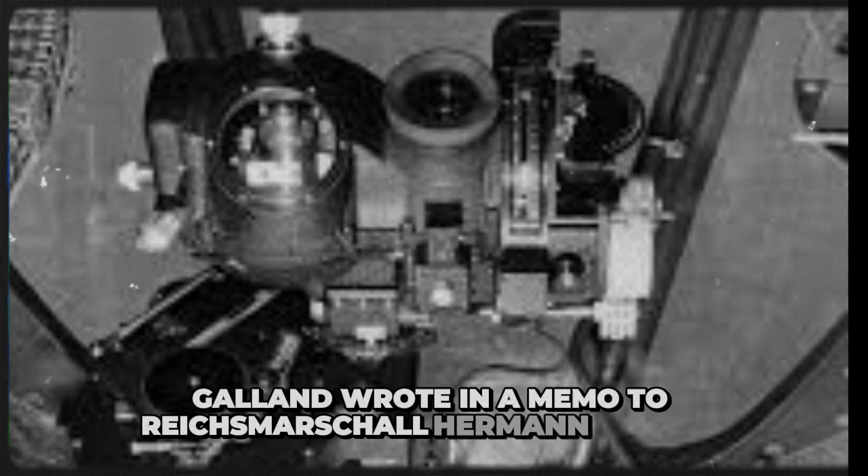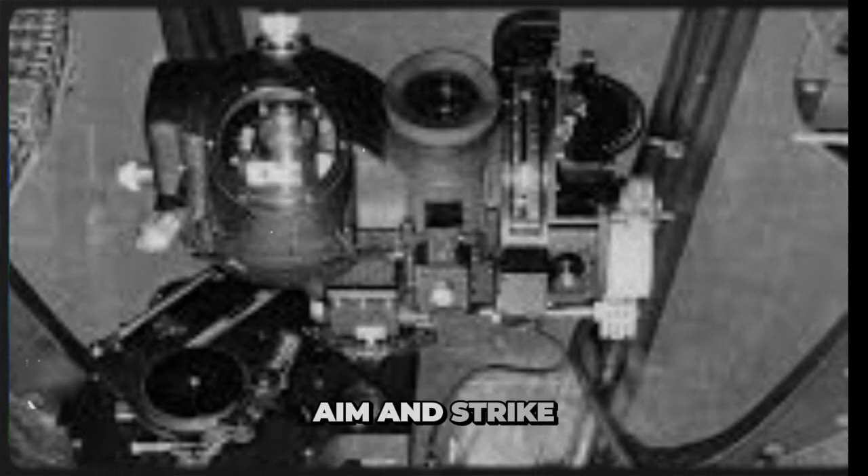'They can see what they're hitting,' Galland wrote in a memo to Reichsmarschall Hermann Göring in February 1943. 'Our bombers drop their loads in the general vicinity of targets and hope. The Americans select, aim, and strike, with a precision that suggests they possess technology we cannot match with our current methods.'

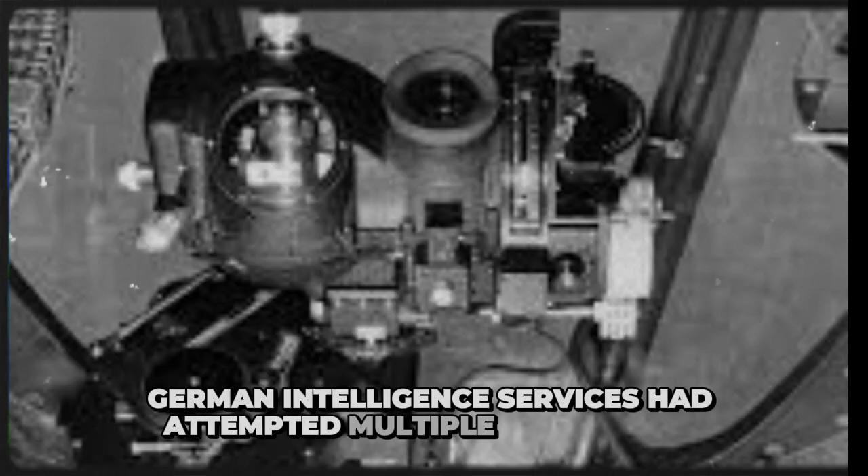The race to acquire a Norden bombsight had been ongoing since 1941. German intelligence services had attempted multiple approaches, recruiting American factory workers, bribing Air Corps personnel, even planning commando raids on American bases in England. All had failed.

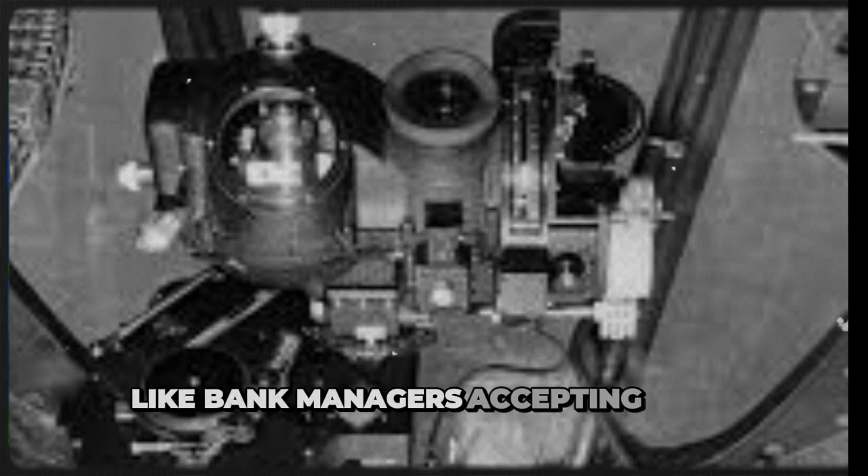The Americans had implemented security measures that seemed paranoid even by German standards. Each Norden bombsight had a serial number tracked from manufacture to deployment. Bombardiers signed for their devices like bank managers accepting gold reserves. Before every mission, the sight was carried to the aircraft in a locked case. After landing, it was removed immediately and returned to a secure facility.

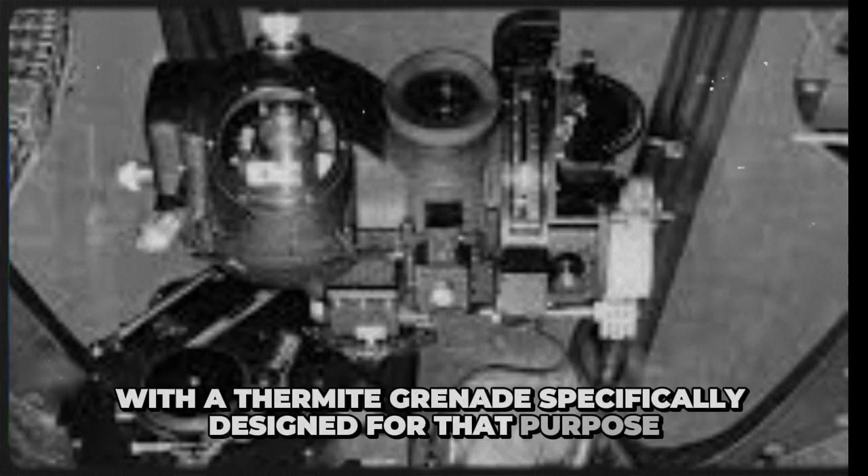If a bomber was badly damaged and forced to ditch over the ocean or crash land in enemy territory, standing orders required the bombardier to destroy the sight with a thermite grenade specifically designed for that purpose. The Germans had recovered dozens of crashed B-17s, but every bombsight had been destroyed, melted into slag, shattered by explosions, or smashed by desperate crew members before capture, until June 27, 1943.

The bomber that crashed in Wilhelmshaven had been hit by flak during its bombing run. The explosion had killed the bombardier instantly and started fires throughout the aircraft. The pilot had managed to maintain control long enough to clear the city before the plane came apart in mid-air. The bombardier's compartment, including the Norden sight, had separated from the fuselage and crashed into a muddy field outside the city. The soft earth had cushioned the impact.

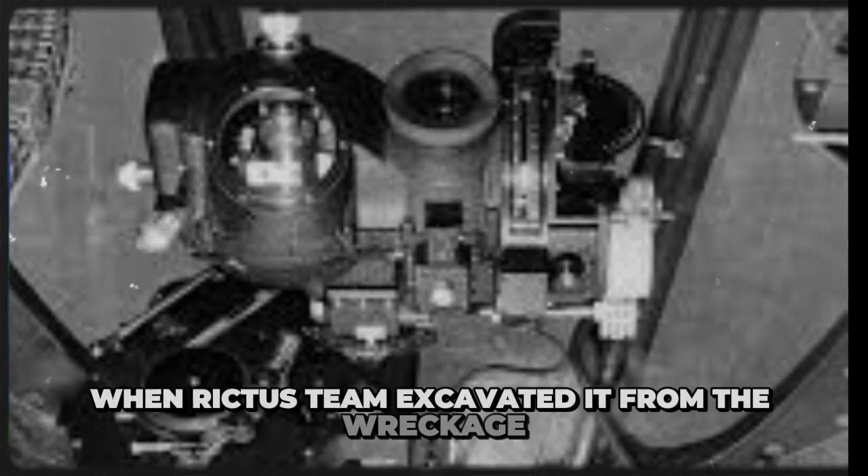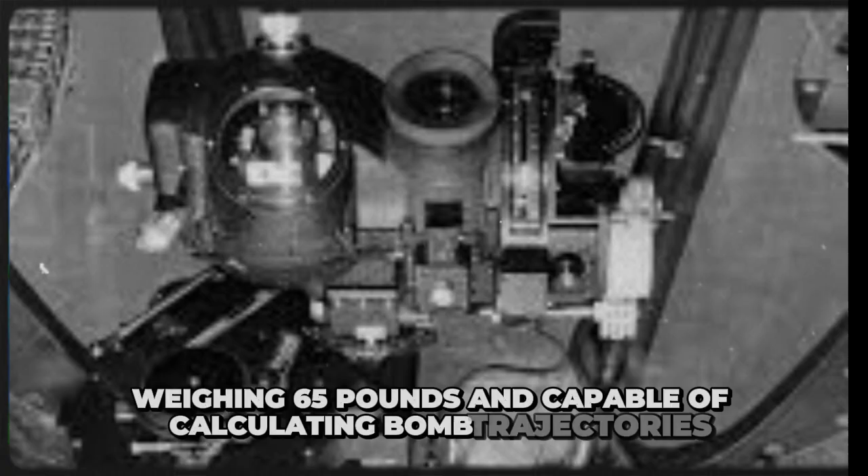The bombsight, designed to survive the vibrations and stresses of high-altitude flight, had remained largely intact. When Richter's team excavated it from the wreckage, they found themselves looking at a device that seemed almost alien in its complexity. The Norden Mark XV was a masterpiece of American precision engineering, a gyroscope-stabilized analog computer containing over 2,000 individual parts, weighing 65 pounds, and capable of calculating bomb trajectories while compensating for altitude, airspeed, wind drift, and the Earth's rotation.

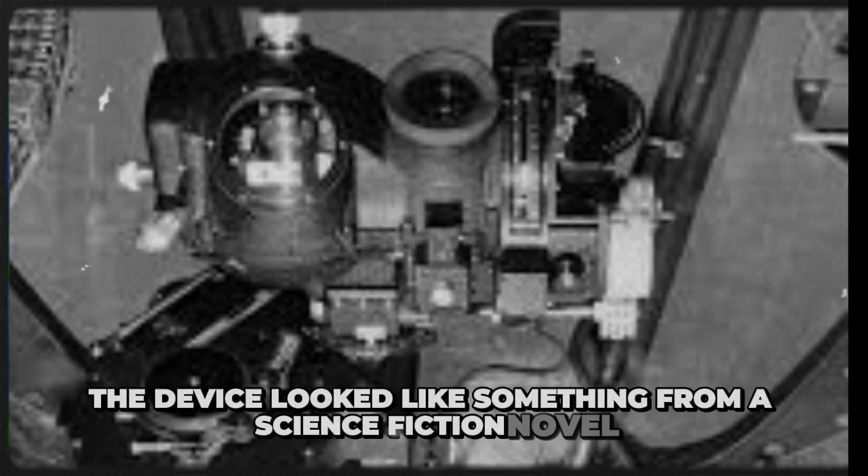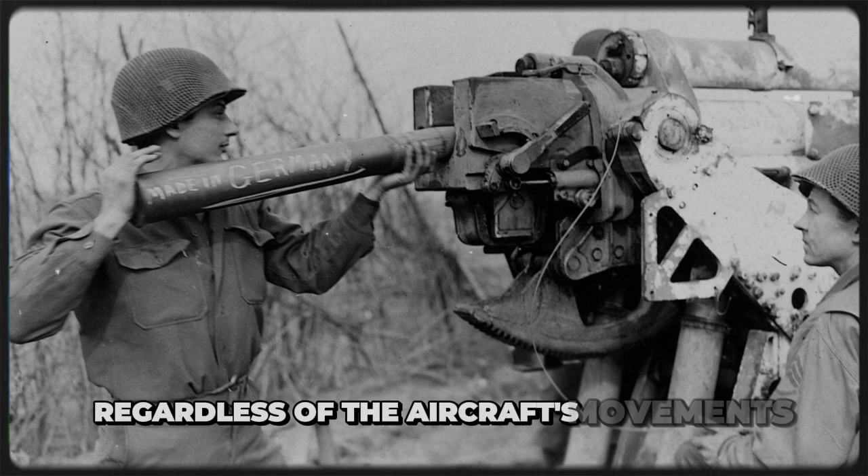The device looked like something from a science fiction novel. Two main components dominated the assembly: the stabilizer, which used gyroscopes to maintain a stable platform regardless of the aircraft's movements, and the sight head, which allowed the bombardier to track the target and feed corrections into the computer. Between these components ran a maze of gears, cams, bearings, and mechanical linkages of breathtaking precision.

"Photograph everything before we move it," Richter ordered. "Document the position of every component. We may never get another chance like this."

The team worked through the night, taking hundreds of photographs from every angle. They sketched diagrams, measured dimensions, and carefully noted how components connected to each other. By dawn, they had created a preliminary technical file that filled 2 briefcases. The bombsight itself was packed in foam rubber, placed in a wooden crate, and loaded onto a truck for the journey to Rechlin. At Rechlin, the Luftwaffe's most experienced engineers gathered to examine the prize.

Dr. Hermann Föttinger, who had designed bombsights for the Luftwaffe since 1935, was given the honor of the first detailed examination. He spent 6 hours studying the device with magnifying glasses, micrometers, and calipers, taking measurements and making notes. His preliminary report, submitted that evening to Luftwaffe Command, was both awed and troubled.

"This device represents the highest achievement in mechanical analog computing I have ever witnessed," Föttinger wrote. "The precision of its components exceeds anything we currently manufacture. The complexity of its calculating mechanisms is extraordinary. However, I must note with concern that replicating this device will require capabilities that may exceed our current industrial capacity."

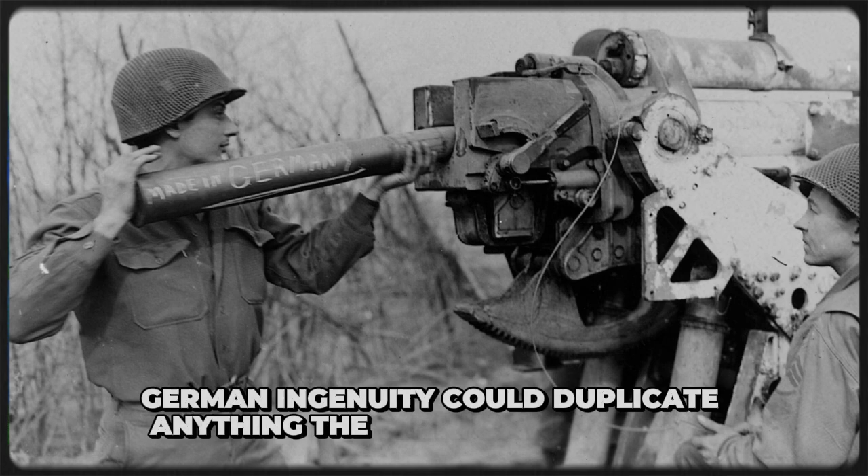The reverse engineering project was assigned to a special task force, codenamed Unternehmen Adlerauge, Operation Eagle Eye. Dr. Föttinger was appointed technical director, with a team of 50 engineers, machinists, and technicians drawn from Germany's finest aviation facilities. They were given unlimited access to materials, tools, and support staff. Reichsmarschall Göring himself declared the project a top priority, ranking with the development of jet fighters and rockets.

The team began by completely disassembling the Norden Bombsight. Each component was catalogued, measured, sketched, and analyzed. They discovered quickly that the Americans had not designed this device for easy replication. Many components were manufactured to tolerances that pushed the boundaries of what German equipment could measure, let alone reproduce.

The gyroscopes, for instance, were marvels of precision engineering. Each rotor was balanced so precisely that it could spin at 10,000 revolutions per minute for hours without deviation. The bearings supporting these rotors were manufactured to tolerances of 1/10,000th of an inch, dimensions so small that German measuring equipment could barely detect the variations.

"We can measure these tolerances," reported Hauptmann Werner Schulz, the team's lead machinist, "but I'm not certain we can manufacture to them. These bearings are smoother than anything I've seen in German production. The Americans must have manufacturing processes we're unfamiliar with."

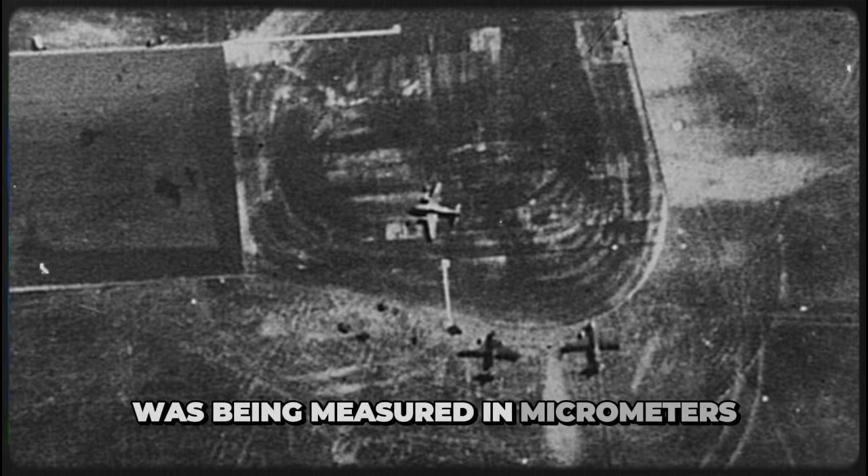Föttinger convened a technical conference at Rechlin to assess the situation honestly. Present were representatives from Germany's major manufacturing firms: Zeiss, Siemens, Bosch, Krupp, and Daimler-Benz. The Luftwaffe's technical staff attended, along with representatives from the Reich Ministry of Armaments and War Production. What emerged from 3 days of frank discussion was a portrait of American industrial superiority that shocked even experienced engineers.

The conference began with a component-by-component analysis of the Norden Bombsight, identifying specific obstacles to German replication. The findings were documented in a report that would remain classified until 1980. But its conclusions were unambiguous. American manufacturing had achieved capabilities that Germany could not match, not through any single breakthrough, but through systematic investment in precision at every level of production.

The gyroscope assembly illustrated the problem perfectly. The Norden's gyroscopes were the heart of its stabilization system, maintaining a level reference plane regardless of the aircraft's motion. Each gyroscope consisted of a rotor spinning at 10,000 revolutions per minute within a housing, supported by bearings that had to be nearly frictionless.

Oberingenieur Rudolf Meyer, from the Zeiss works, presented an analysis that left the room silent. 'We examined the gyroscope rotor under our finest microscopes,' Meyer explained. 'The surface finish is extraordinary. We measured roughness values of 0.5 micrometers, half a millionth of a meter. Our best production processes achieve 2 to 3 micrometers. This isn't just better, it's a different category of precision.'

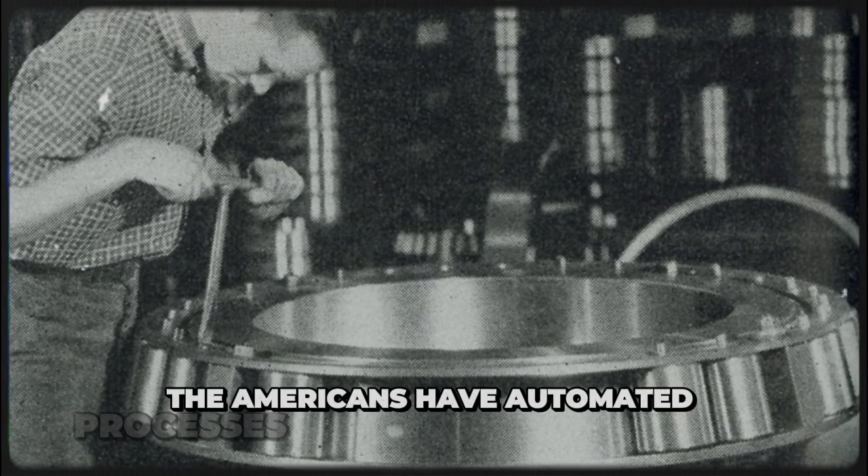'But here's what troubles me most,' Meyer continued. 'These aren't hand-polished laboratory specimens. The wear patterns and manufacturing marks indicate these were mass-produced. The Americans have automated processes that achieve surface finishes we can only accomplish by hand, one piece at a time.'

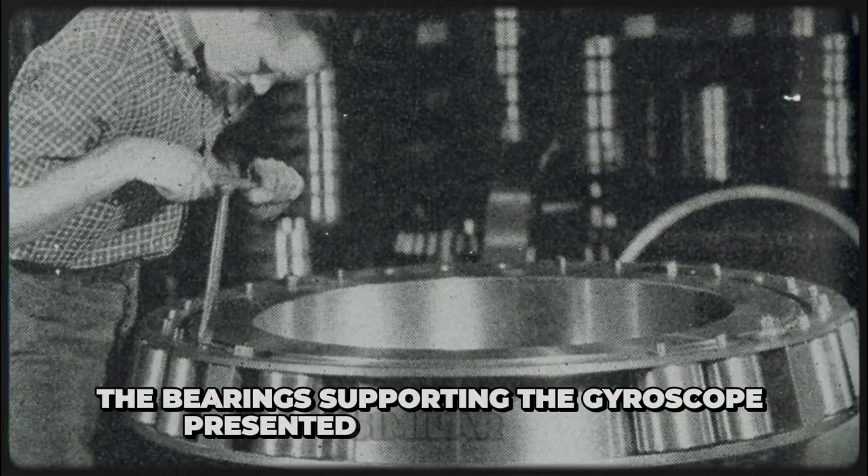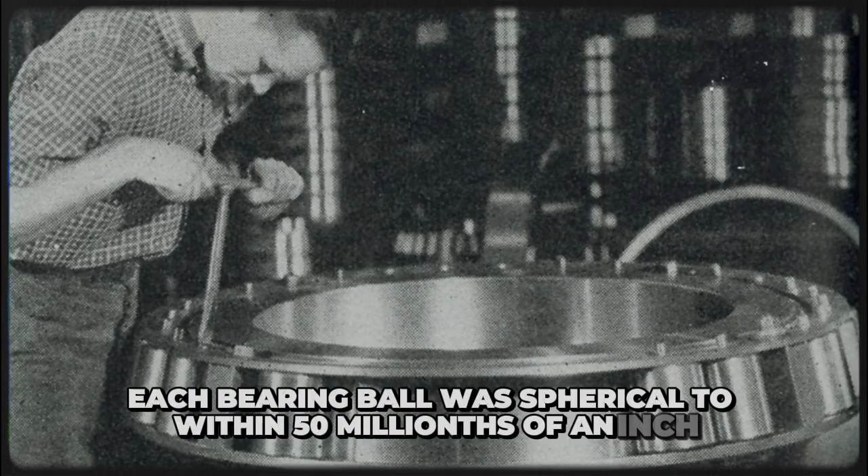The bearings supporting the gyroscope presented similar challenges. The Norden used miniature ball bearings, manufactured to incredible precision. Each bearing ball was spherical to within 50-millionths of an inch, a tolerance that German engineers could measure but not reliably achieve in production. Hauptmann Werner Schulz, the team's lead machinist, had spent weeks trying to manufacture equivalent bearings.

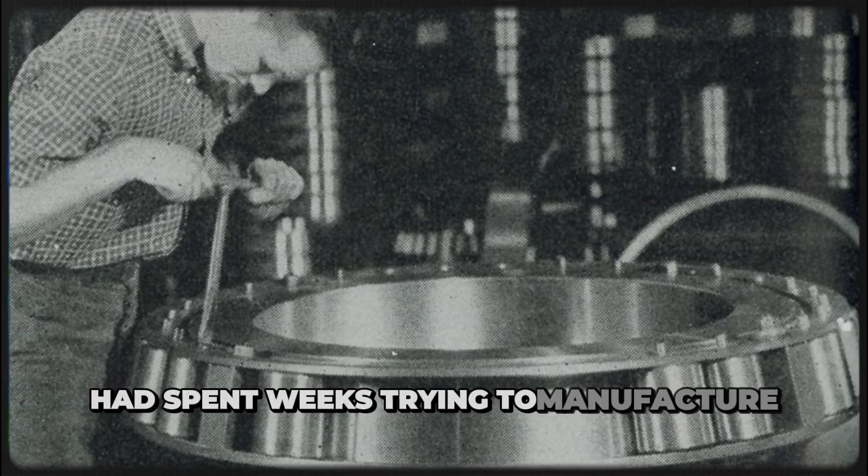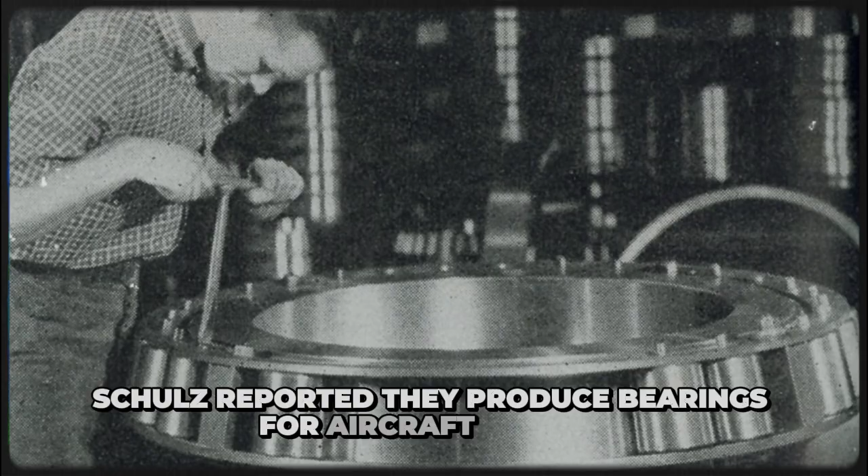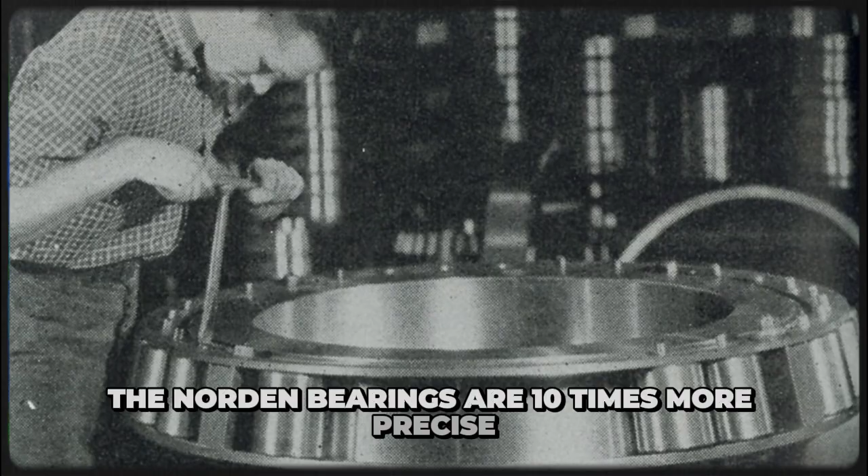'Our bearing manufacturers are excellent,' Schulz reported. 'They produce bearings for aircraft engines, machine tools, everything we build, but they're working to tolerances of 1/1000th of an inch. The Norden bearings are 10 times more precise. When I showed our samples to engineers at SKF, Germany's premier bearing manufacturer, they said achieving such precision in mass production would require completely new grinding equipment, new quality control instruments, and new manufacturing processes they'd need years to develop.'

The gear trains presented another dimension of the problem. The Norden used dozens of precision gears, some cut with teeth so fine they were barely visible to the naked eye. These gears meshed together with almost no backlash, the slight gap between gear teeth that was standard in German precision gears. Dipl. Ing. Franz Weber, from Daimler-Benz's precision department, had attempted to duplicate the gear trains.

His report was sobering. 'We can cut gears to the required specifications,' Weber explained, 'but only on our finest gear-cutting equipment, running at slow speeds.'

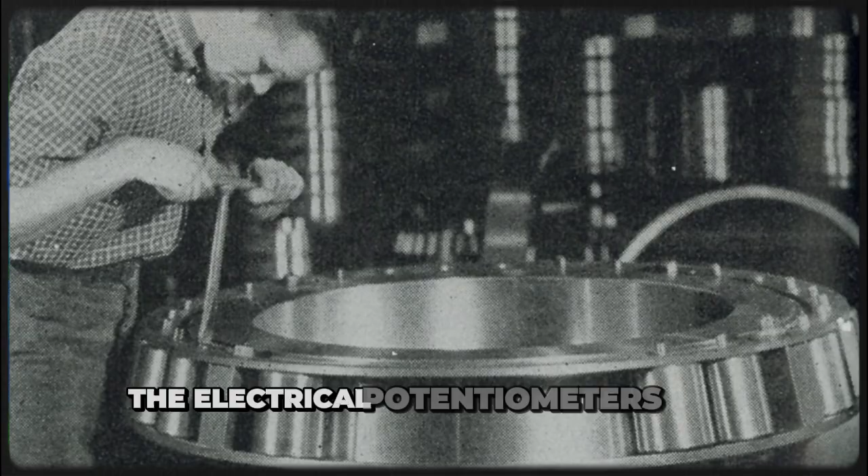This pattern repeated across every major component. The electrical potentiometers used precision-wound wire resistors with resistance values accurate to 1%. German electrical components typically varied by 5% or more. The mechanical linkages used bushings manufactured to tolerances that eliminated play without binding.

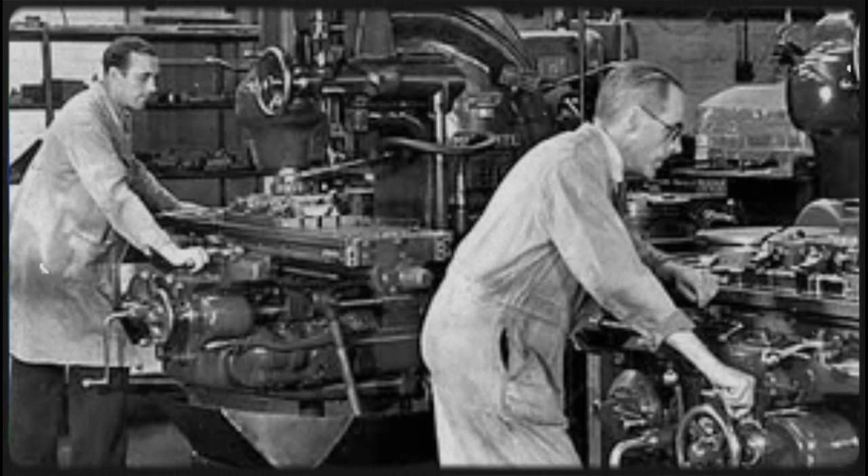German machinists achieved through careful hand-fitting what the Americans apparently accomplished in routine production. Perhaps most frustrating was the sight's optical system. Germany had led the world in optical manufacturing for decades. Zeiss lenses equipped cameras, microscopes, and telescopes worldwide.

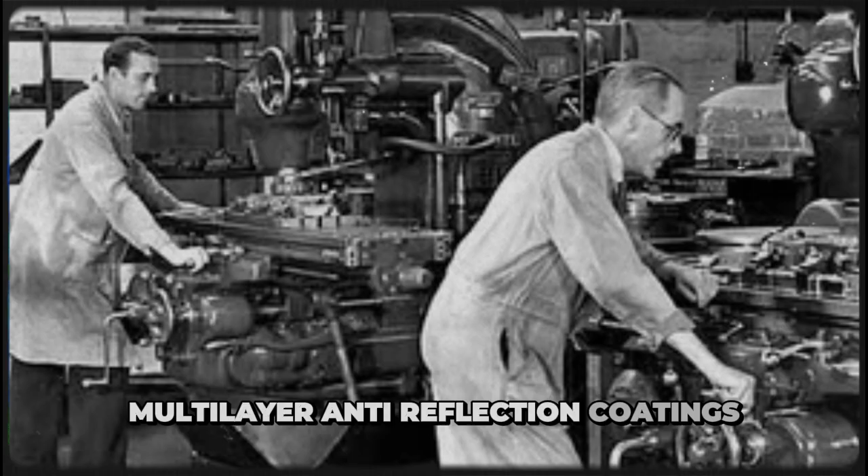Dr. Ernst Gundlach from Zeiss presented an analysis of the sight's telescope. The glass quality is superb, Gundlach reported. The coatings on the lenses are sophisticated multi-layer anti-reflection coatings that we've only recently begun experimenting with. But what surprises me most is the mechanical mounting. The lenses are positioned and secured with a precision that rivals our finest laboratory instruments. This isn't just good optical design, it's manufacturing excellence.

The mounting system used threaded retaining rings cut so precisely that they could position lenses to tolerances of 1/10,000th of an inch. German optical instruments achieved similar precision through painstaking hand adjustment by skilled technicians. The Norden appeared to achieve it through precise manufacturing that eliminated the need for hand fitting. This suggests, Gundlach continued, that the Americans have machine tools capable of cutting threads more precisely than our standard equipment. More than that, they apparently use such precision routinely, not just for special applications.

In nearly every area - mechanical precision, surface finishes, material quality, manufacturing tolerances - American production exceeded German capabilities, not dramatically in any single dimension, but consistently across the board. The cumulative effect was a device that Germany couldn't replicate, despite understanding its design completely.

General Major Adolf Galland, observing the conference, cut through the technical details to ask the strategic question: why? How did the Americans achieve this industrial superiority? What do they have that we lack? The answer, pieced together from intelligence reports and the team's analysis, revealed fundamental differences in how the two nations approached manufacturing.

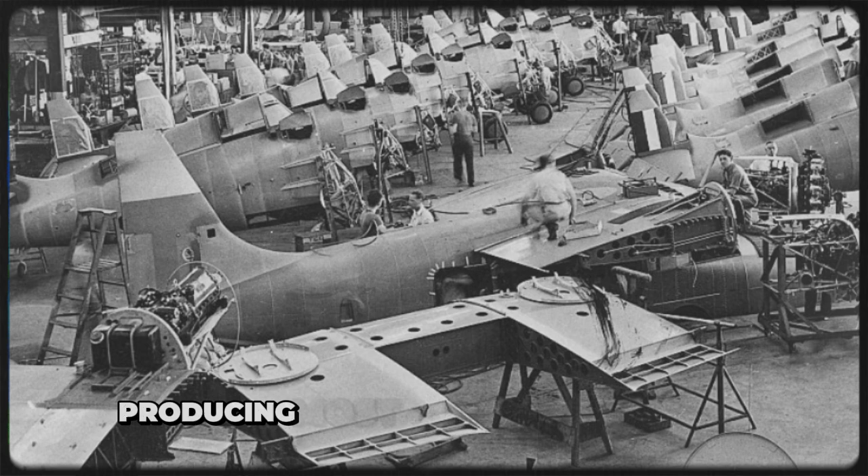The contrast with German practice was stark. German aircraft manufacturers were largely self-sufficient, producing most components in-house. This vertical integration made them less dependent on outside suppliers, but limited their access to specialized expertise and equipment.

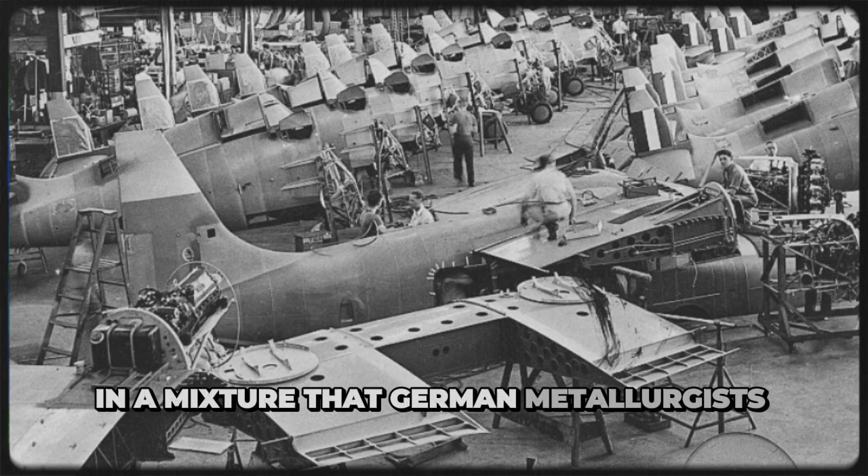Material science: analysis of the Norden components revealed American advantages in metallurgy that hadn't been apparent until close examination. The beryllium-copper alloy used in gyroscope rotors combined strength, low weight, and non-magnetic properties in a mixture that German metallurgists struggled to duplicate. The aluminum alloys used in structural components showed heat treatments that produced optimal combinations of strength and machinability.

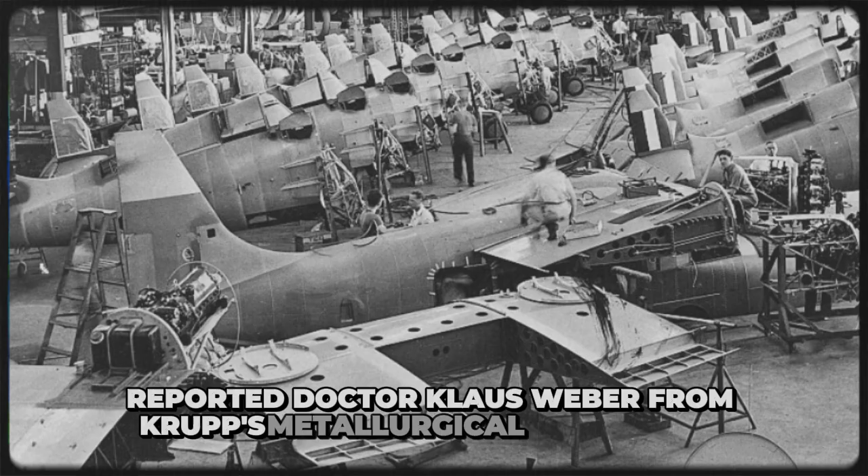What we're seeing, reported Dr. Klaus Weber from Krupp's metallurgical laboratory, is evidence that the Americans have made advances in material science that we haven't matched.

These aren't exotic materials, they're practical alloys designed for manufacture, but optimized in ways that suggest systematic research we haven't conducted. German metallurgy was excellent for its primary applications—armor plate, gun barrels, engine blocks—but precision instruments required different material properties, and here American research had apparently advanced further.

The most sobering realization came when the team attempted to cost out manufacturing a German copy of the Norden Bombsight. Even assuming they solved all the technical challenges, the manufacturing cost would be astronomical.

Hauptmann Friedrich Schmidt, the team's production engineer, presented estimates that shocked the conference: 'If we could manufacture all components to specifications, which we currently cannot, the unit cost would be approximately 45,000 Reichsmarks per bombsight. For comparison, we produce the standard German Lotfe 7 bombsight for 1,200 Reichsmarks.' The Americans, intelligence suggested, were producing Norden bombsights for approximately $8,000 each, roughly 20,000 Reichsmarks at exchange rates—a device of far greater precision for less than half what it would cost Germany to produce.

'This disparity,' Schmidt continued, 'reflects the Americans' investment in precision manufacturing infrastructure. They've built factories optimized for precision production. We're trying to achieve precision using equipment designed for different purposes. It's like trying to perform surgery with carpentry tools—theoretically possible, but extremely difficult and expensive.'

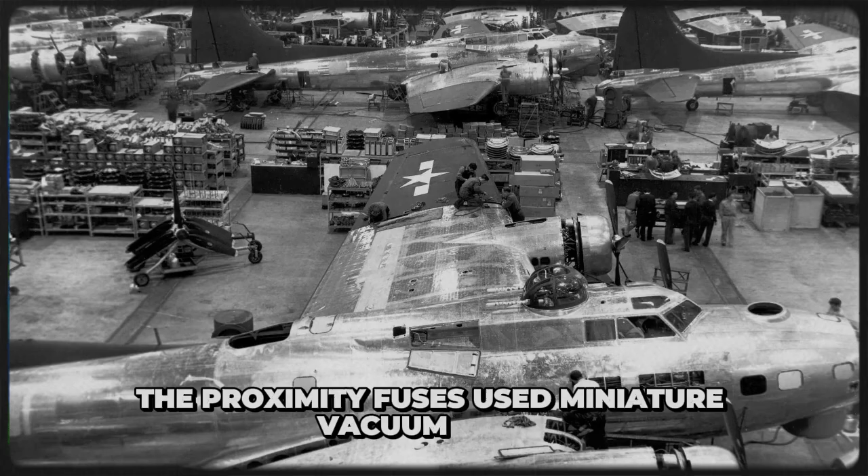When German forces recovered unexploded American artillery shells in Italy in early 1944, technical analysis revealed devices of stunning sophistication. The proximity fuses used miniature vacuum tubes manufactured with precision that German electronics firms deemed impossible for mass production. The tubes had to survive extraordinary mechanical stresses, while maintaining electrical characteristics within tight tolerances.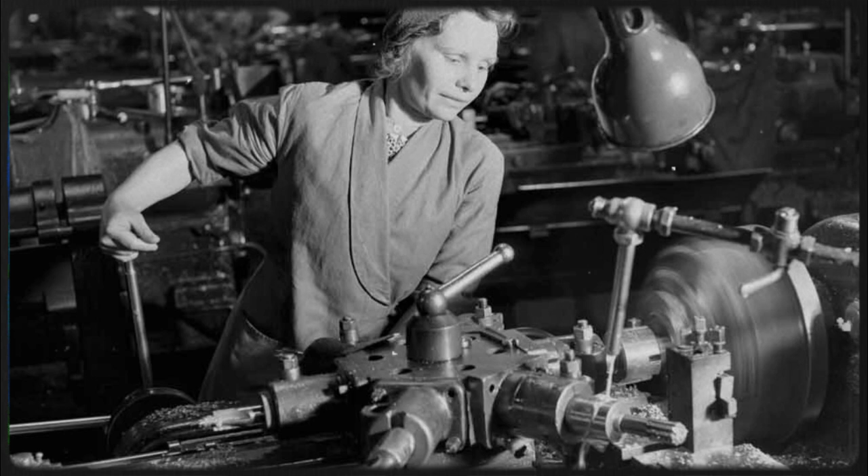Wilhelm Meyer, from the Reich Research Council, examined captured proximity fuses and reported findings that echoed the Norden bombsight analysis. "The Americans have manufactured over 1 million of these devices," Meyer wrote. "Each one contains components we couldn't produce in quantity in laboratory conditions, yet they're manufacturing them by the thousands daily. This suggests manufacturing capabilities that exceed our own by a substantial margin."

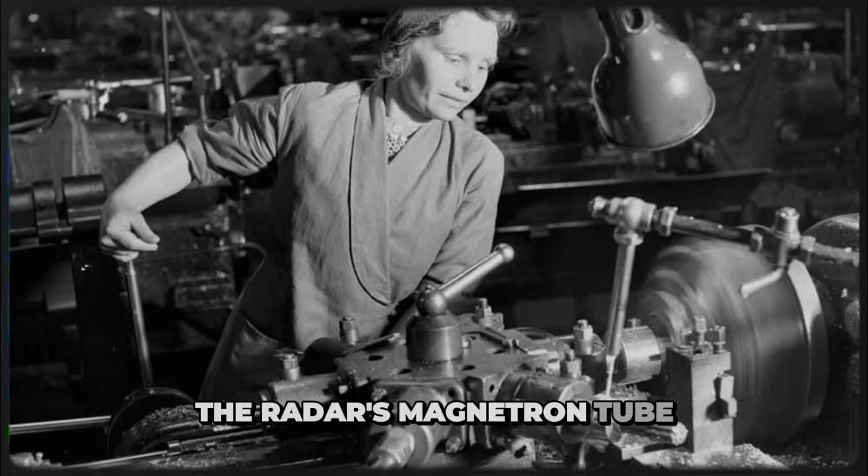The pattern continued with radar systems. American shipboard and airborne radar was proving consistently superior to German equivalents. When a captured B-17 yielded its radar bombing system in early 1944, German engineers discovered precision manufacturing throughout. The radar's magnetron tube operated at frequencies that required tolerances German manufacturers struggled to achieve. The waveguides were machined to smoothness that matched the Norden bombsight's components. The antenna positioning systems used bearings and gears of familiar precision.

Generalleutnant Wolfgang Martini, head of the Luftwaffe Signals Service, drew uncomfortable conclusions. In a May 1944 report: "American radar components consistently show manufacturing precision exceeding our standards. This isn't random, it reflects systematic capability. We should assume that any American system requiring precision manufacturing will demonstrate similar advantages."

The strategic implications extended beyond individual weapons systems. If America possessed across-the-board advantages in precision manufacturing, they could produce not just more weapons, but more sophisticated weapons. In a technological arms race, Germany was competing with one arm tied behind its back.

The Norden Bombsight failure highlighted another critical difference: America's approach to military technology development. The Germans had traditionally focused on developing clever solutions with available resources. American development philosophy appeared different: design optimal solutions, then build the manufacturing capacity to produce them.

This philosophical difference manifested in aircraft design. German fighters like the Bf-109 and Fw-190 were masterpieces of engineering, sophisticated aircraft designed to be manufactured with available materials and processes. They used simple landing gear, minimal electrical systems, and components that German industry could produce in quantity.

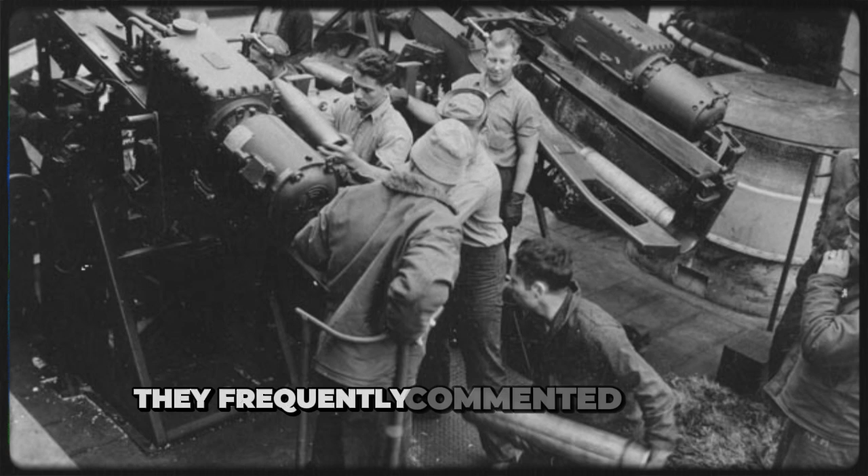When Luftwaffe pilots captured or examined American aircraft, they frequently commented on the quality of construction. Parts fit precisely without hand-fitting. Electrical systems were reliable and well-engineered. Manufacturing quality exceeded German standards even for mass-produced aircraft.

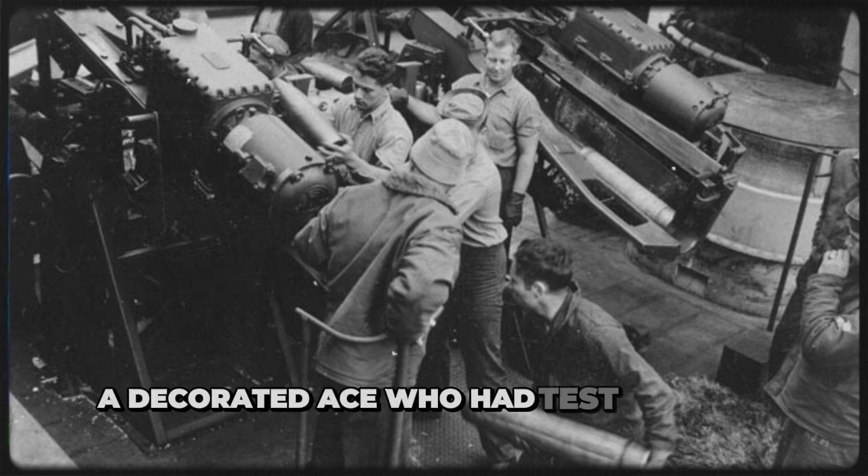Oberst Hermann's April 1944 report included testimony from test pilots who had flown captured American aircraft. "The Americans don't build cheap aircraft quickly," reported Major Heinz Baer, a decorated ace who had test-flown a captured P-51. "They build expensive aircraft quickly. Every system shows quality construction. This suggests they can afford to manufacture to higher standards while still producing in large quantities."

This observation cut to the heart of Germany's industrial dilemma. Germany was manufacturing weapons designed for rapid, economical production, yet still couldn't match American output. America was manufacturing weapons designed to higher standards and still producing more.

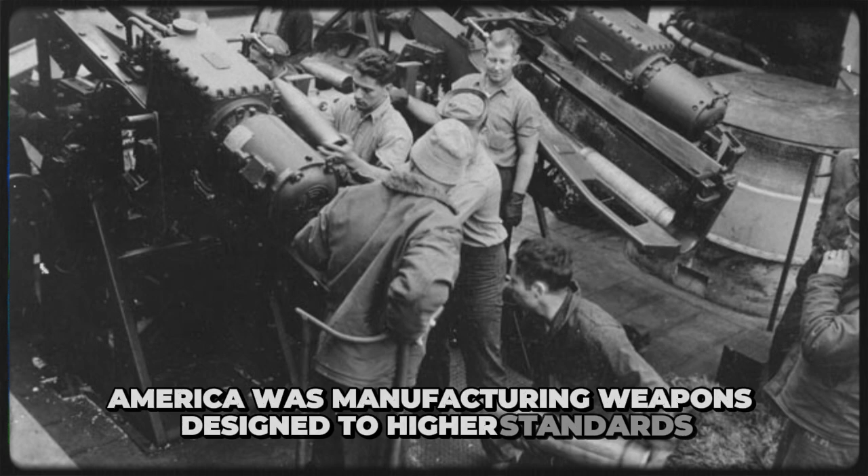The mathematics were devastating. Intelligence estimates suggested America was producing 96,000 aircraft annually by mid-1944, more than Germany's total production for the entire war. These weren't simple aircraft, they were sophisticated bombers, fighters, and transport planes incorporating advanced systems. Each B-17 bomber contained over 400,000 parts. Each P-51 fighter featured sophisticated systems that would have been limited to prototype aircraft in Germany. America was somehow achieving both quantity and quality, mass production and precision manufacturing.

For German planners trying to understand how the war had turned so decisively against them, the Norden Bombsight provided uncomfortable answers.

By summer 1944, the strategic situation made the Norden Bombsight's lessons tragically relevant. American bombers using these sophisticated sights were systematically destroying Germany's industrial capacity. They were hitting synthetic fuel plants with precision that shut down production for weeks, striking ball-bearing factories, disrupting manufacturing across industries, and demolishing marshalling yards, severing transportation networks. The irony wasn't lost on German observers: America's superior precision manufacturing had produced bomb sights that enabled precise destruction of Germany's less sophisticated manufacturing base. The industrial advantage revealed by the Norden analysis was being used to widen that advantage further.

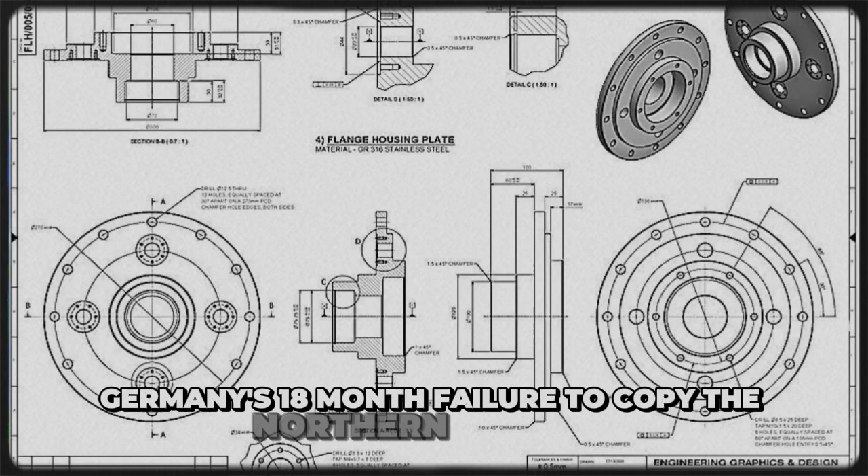Germany's 18-month failure to copy the Norden bombsight revealed industrial limitations that affected everything from radar to aircraft engines to fire control systems. These limitations weren't absolute. German engineering produced remarkable weapons throughout the war, but they were consistent enough to create cumulative disadvantage in the technological competition that modern warfare had become.

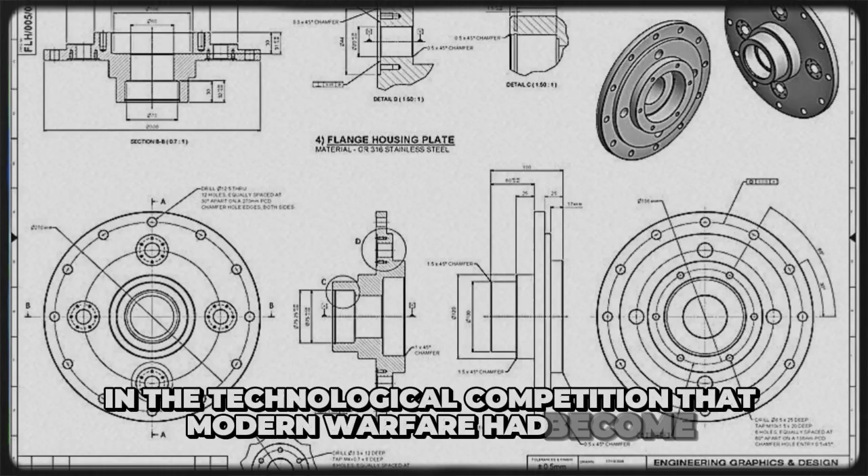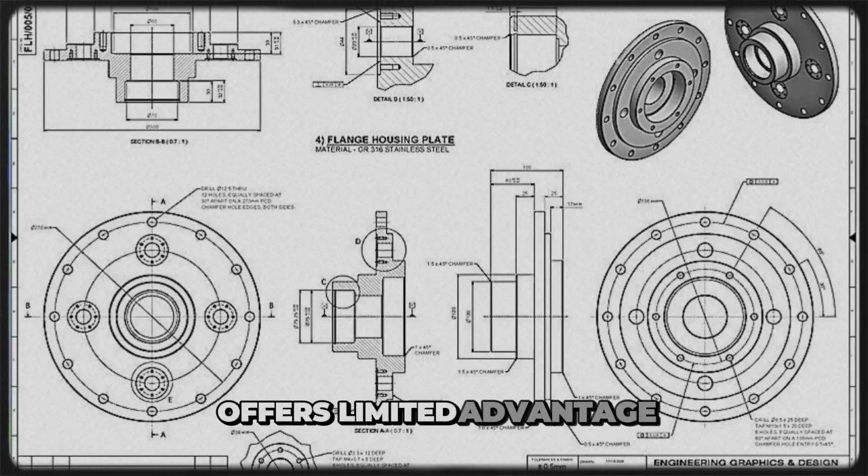The bombsight's lesson was ultimately strategic. In industrial warfare, manufacturing capability matters as much as military capability. Design brilliance without production capacity means little. Understanding enemy technology without the means to replicate it offers limited advantage. Victory flows to the side that can not only invent but also produce sophisticated weapons in quantity.

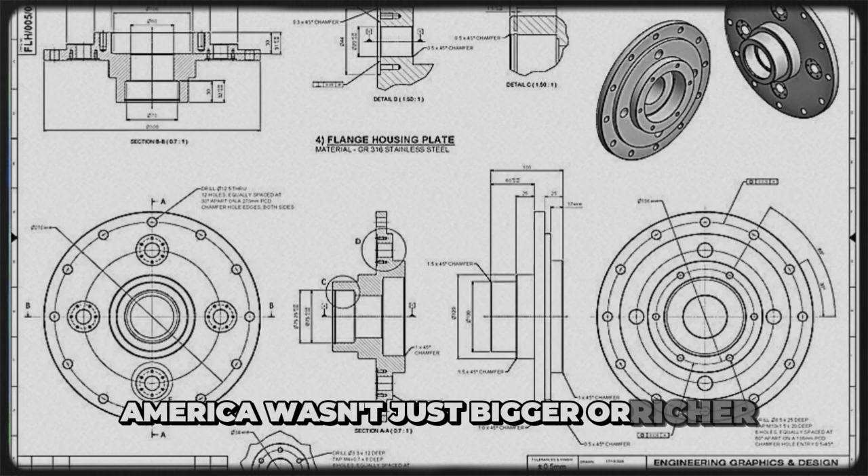The Norden bombsight, that precision instrument recovered from a crashed bomber in June 1943, had revealed truths that many German leaders found difficult to accept. America wasn't just bigger or richer, it was more industrially sophisticated. The United States had built a manufacturing infrastructure capable of producing precision devices as routine products, not laboratory curiosities.

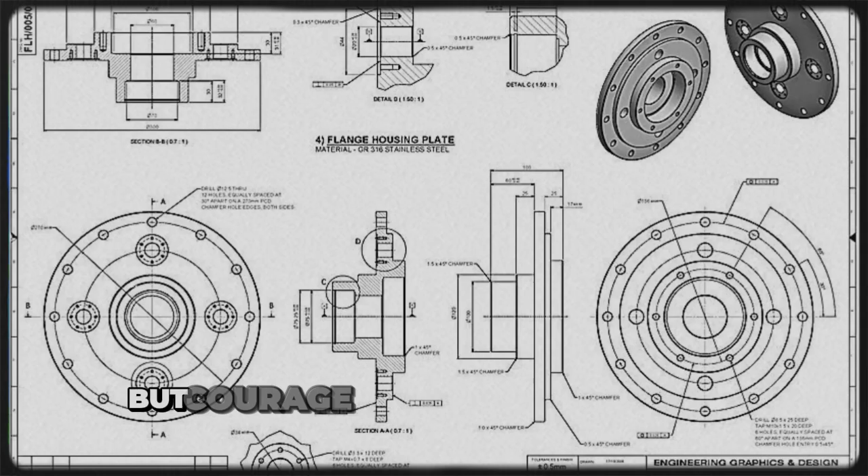Germany had challenged this industrial colossus with courage, ingenuity, and tactical brilliance. But courage cannot overcome ball bearings manufactured to insufficient precision. Ingenuity cannot compensate for grinding equipment that cannot achieve required tolerances. Tactical brilliance matters little when the enemy's bombsights can destroy your factories from altitudes where your fighters cannot reach.

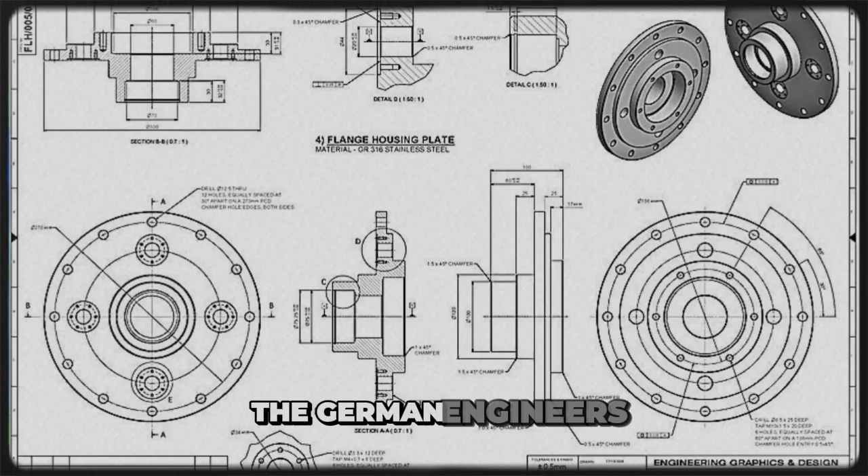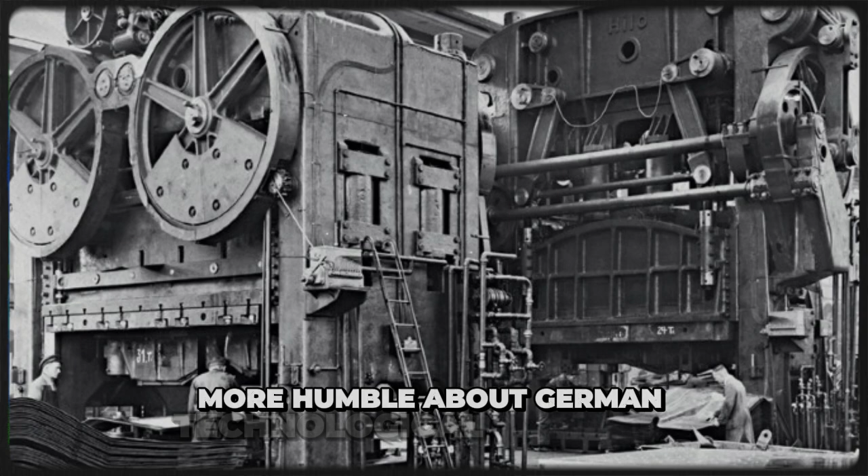The German engineers who spent 18 months trying to copy the Norden bombsight learned these lessons intimately. They returned to conventional bombsight development with new appreciation for the relationship between design, ambition, and manufacturing capability. They became more realistic about what German industry could produce, more humble about German technological advantages, more aware of American industrial strengths. For the broader course of the war, their failure mattered less than what it revealed.

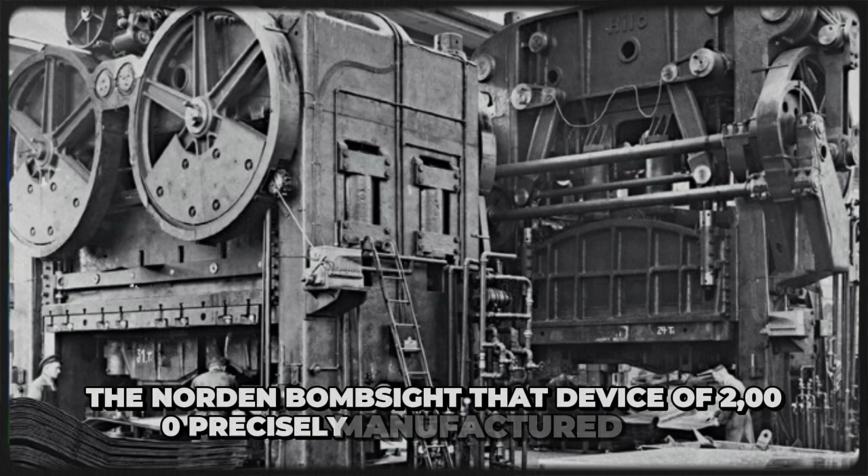Germany was fighting an enemy whose industrial sophistication exceeded its own in critical areas. This advantage compounded over time, allowing America to field increasingly sophisticated weapons, while Germany struggled to maintain production of existing designs. The Norden Bombsight, that device of 2,000 precisely manufactured parts, had proven to be more than a weapons system. It was a message, written in gears and gyroscopes and precision optics, about the nature of modern industrial power. Germany had received that message, understood it completely, and discovered too late that understanding couldn't overcome the manufacturing gap.

In the end, 18 months of German engineering effort had produced not a working copy of the Norden Bombsight, but a sobering realization. They were competing against an industrial system that had evolved beyond their own. The device that had fallen from the sky over Wilhelmshaven had delivered an education far more valuable and far more devastating than any bombing raid.

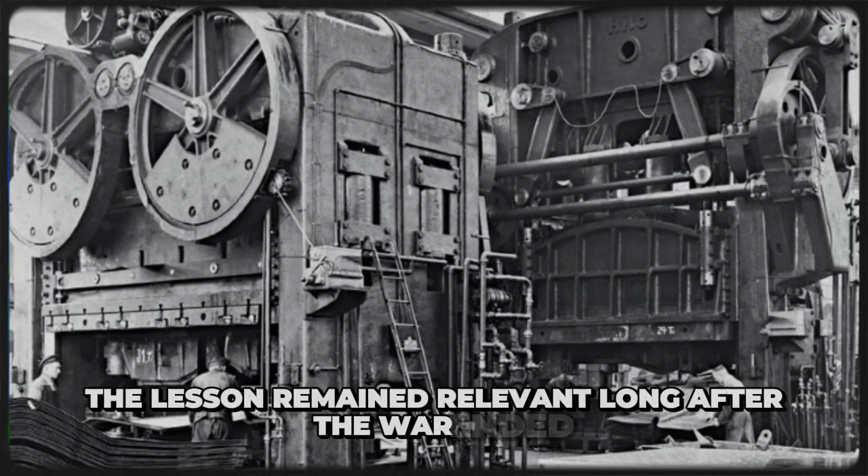The lesson remained relevant long after the war ended. In industrial competition, systematic investment in manufacturing capability matters more than individual brilliance. America had built that capability patiently over decades. Germany had discovered its absence in 18 months of frustrated effort. The difference had helped decide a world war.